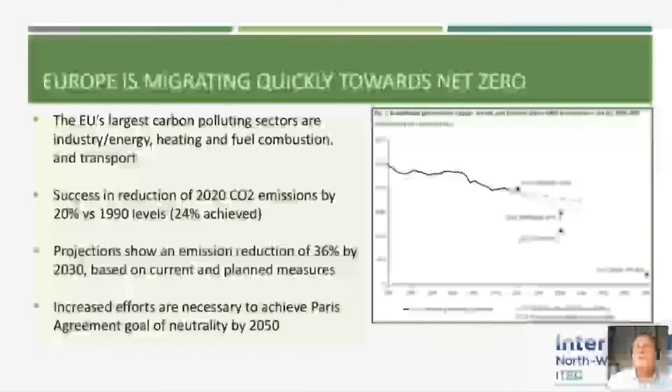So we've heard a little bit from Nigel about what Europe is looking at in terms of its future progression towards net zero. And we've done quite well in terms of the historical picture. We set ourselves a target of 20% by 2020, and everybody achieved that. In fact, we got a better result than we expected. The problem is that in order to get to 2050, we need to accelerate. To get that acceleration, we need to identify new routes for renewables, new locations for renewables, and we need to integrate them with hydrogen as quickly as possible.

The goal now has shifted. By 2030, it used to be up at about 36%. Now we need it to be 55%. And in the UK, as Nigel mentioned, we're looking at about a 75, 78% number by 2035. So every country is beginning to tighten its environmental requirements, and that is driving industry forward at an accelerated rate.

So what does that mean in terms of renewables? Well, the EU has targeted 40 gigawatts of offshore renewables, or sorry, general renewables by 2030, with that growing to maybe 300 gigawatts by 2050. Now, they seem like enormous numbers, and in fact, they are enormous numbers in terms of what we have in

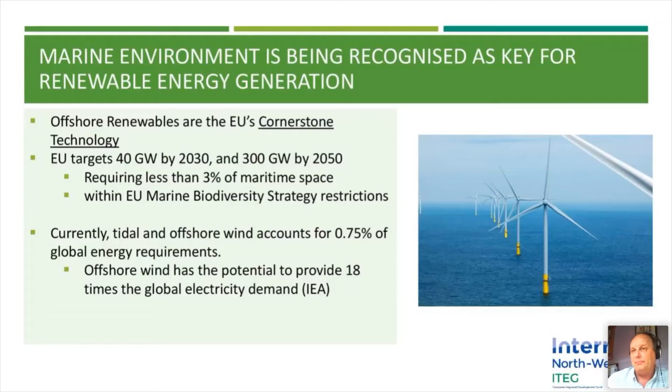So at the moment, what we see is that the offshore and tidal opportunities only account for a very small percentage of global energy requirements. And what we need to do is to step that up. And we see that potential occurring, as Nigel's map indicated. This is all about clustering and electrification of energy streams in the future.

So today what we have is a very good success in terms of creating renewable electricity, and we need that electricity to begin to penetrate into other energy value chains, such as natural gas, such as fossil fuel mobility. And we're seeing those changes begin to occur today. And even if we look at the success that we've had in the last 5-6 years, we've seen green hydrogen

pricing drop dramatically. But what we already know, and again, referring to the map, and I do like that map, Nigel, I'll have to steal it from you at some point, the map which shows the areas of Europe that will require importation of energy, in other words, hydrogen that they cannot actually manufacture themselves. So we know that certain parts of Europe will require the movement of energy in the future.

And we're already seeing that the renewable energy picture is beginning to encompass that. So we're seeing plants being built in the Middle East and in Australia, looking for their customers in different countries and creating mechanisms to move those molecules or those electrons across the world in different forms. And the forms that are being looked at the moment are mainly chemical. So we're looking at ammonia or methanol.

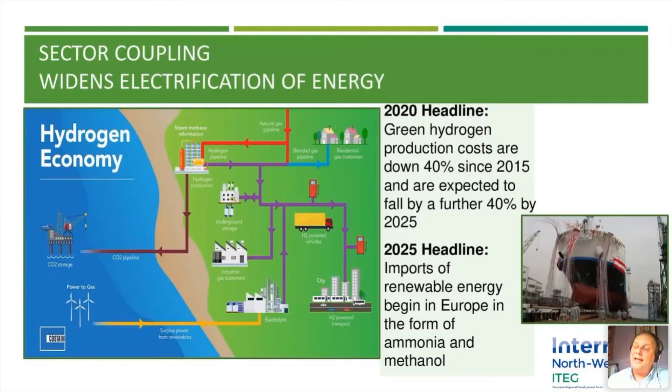And then we're going to need to migrate that energy across the rest of Europe. We'll use natural gas pipelines for that. We convert it into hydrogen, but we're also going to see our chemicals infrastructure converted to renewable structures as well, and thereby undergo this similar electrification. So this is all about scaling up this demand.

And if we look at some of the predominant renewables, obviously wind is one of those. And in Europe, what we've seen, and again, referring back to Nigel's slide, he looked at the UK's position on wind. If I take you a little bit further towards the European coast and look at Belgium and the Dutch coast, we see the scale of electrolysis and the scale of wind investments becoming increasingly large, and with plans to go still larger over the next decade.

And we're seeing both business development and first stage equipment development of multiple numbers of electrolyzers. These electrolyzers are in the hundreds of megawatt scale. Just, let's say, 2-3 years ago, we were looking at 1 megawatt being a world scale PEM size electrolyzer. So what we're seeing is that this technology is scaling very rapidly, and those graphs in the middle of this particular slide show how quickly we're seeing that picture change.

We're seeing the average size of each electrolyzer installation that's actually gone in the ground grow, and we're seeing the future potential in terms of the planned electrolysis systems also grow markedly. And it's a bit like this hockey stick approach.

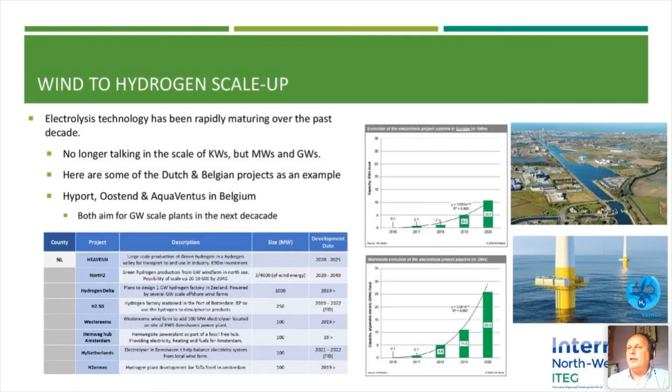But it's not all wind, and we shouldn't just assume that offshore means offshore wind. We have the opportunity of looking at three other different marine technologies, one being floating solar, another being wave, and one that I will focus on for the rest of this presentation, which is tidal.

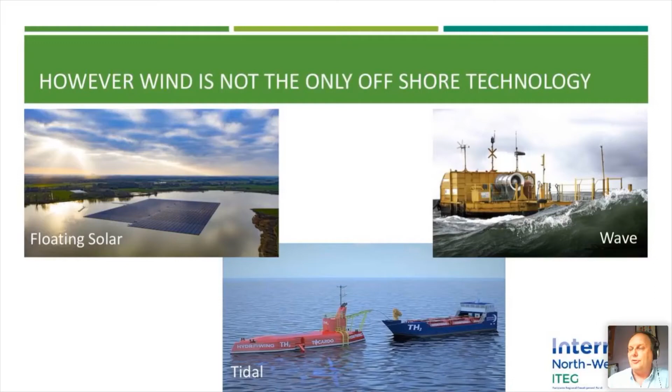So tidal has this position in that it's always been nearly there, nearly getting to the stage where we get a commercial project. We've had a number of false dawns, a bit like the hydrogen false dawns of a few decades ago. But what we're seeing now is some new companies entering into the fray, if you like, and scaling up some of the technologies that have hitherto been deployed by other companies that have since failed.

So we're seeing that tidal still needs support because the investor community is not completely aligned to its future potential yet. But we are also seeing that those innovative companies, normally based either in the UK or along the European coastlines, are coming forward with new technologies and creating new designs for us.

And the IEA has already set out its stall, if you like, that it expects tidal to play a part in this renewables future that we're all going to see. And in order to get to where the IEA believes that marine energy, or at least tidal energy, should be, we need to see something like a 20 to 30% year-on-year growth rate in order to achieve that position.

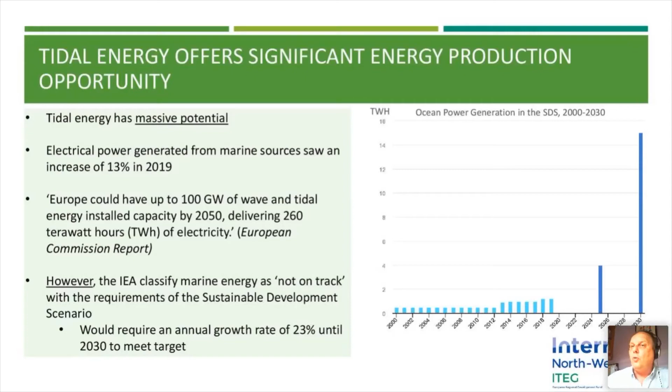So the reason why the UK is particularly interested in tidal is it's probably got some of the best tidal resource in the world, and I would include Ireland in that as well. And we've seen some of the initial development projects go on around our shorelines as well. So this particular technology could offer the UK and the coastal regions of Europe a very prominent position that could then be used as an export market going forward. And I think that's what the European Union is particularly interested in.

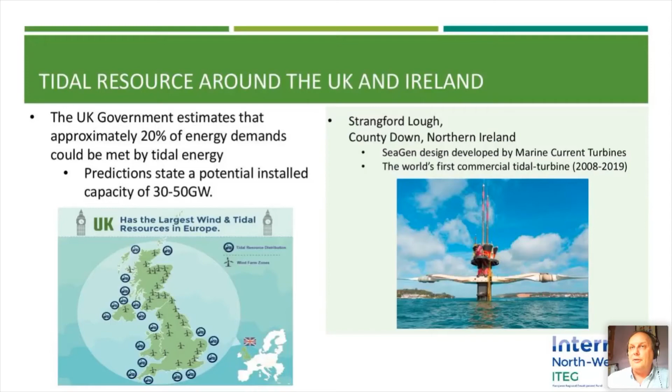If I introduce you to the motley crew that are running the ITEG project, it's a group of companies and academic institutions that have come together in order to try and facilitate the proof of marine energy integration into the European electrical grid, but using hydrogen as a storage mechanism. And you've got three main technology actors: Orbital Marine, Elogen, and EMEC in terms of the infrastructure positioning. And what I'd like to do over the next few slides is just give you an indication as to how all of that begins to fit together.

So we have Orbital Marine as part of this consortium. They have recently just built this thing called the O2 tidal turbine. It's currently being positioned in Orkney, just off the shoreline of Eday, the island that Nigel mentioned. And that will then be moored there, and it will be cabled up to Eday to allow its energy to be managed by a new energy management system.

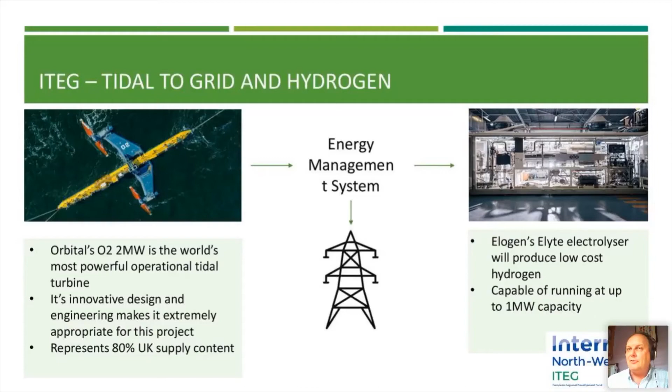That energy management system is going to be designed by EMEC, and then that will feed energy into the grid as required, and where it can't be fed into the grid, it will be fed to an Elogen electrolyzer. And this electrolyzer is quite special because it's capable of running at different rates. In other words, it has a nameplate capacity of 500 kilowatts, but it's also capable of running at higher loads for short periods of time without impacting its longevity, its lifetime. And that can potentially offset the need for the batteries that Nigel was mentioning in terms of the overall scheme.

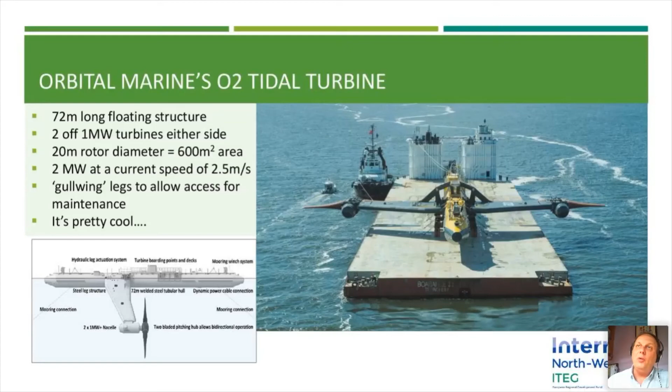So what I want to do is introduce you to these components in a little bit more detail. And really the key one is the tidal turbine. Orbital Marine has been working on this turbine for the last two or three years. Just to give you some element of scale, this thing is 72, 73 meters long. The rotors are 20 meters in diameter. They have, if you like, a 600 square meter area when they rotate. It's an enormous beast at the end of the day.

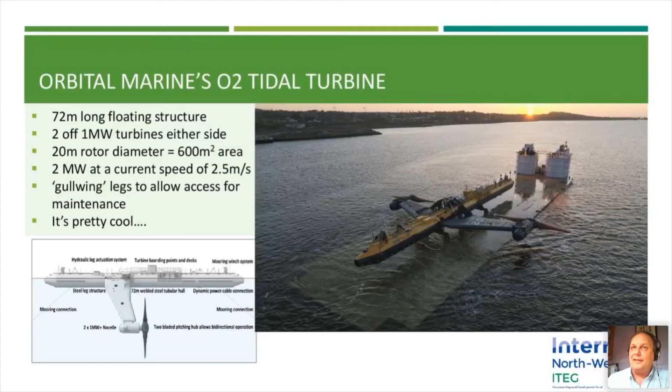And like this slide says, it does look pretty cool, and it probably belongs more in a Star Wars movie than it does in Orkney at this particular moment in time. Mind you, given that Star Wars is filming in the UK at the moment, maybe they can get up and film this as well. But the key piece are the rotors.

The key pieces are how those rotors go into the water and how they can then be moved in a form of a gull wing type structure to allow them to be maintained in a very easy way. So this, as I mentioned, was launched only about a month ago. It's since been towed and maneuvered into place on Orkney, and is effectively beginning its commissioning process.

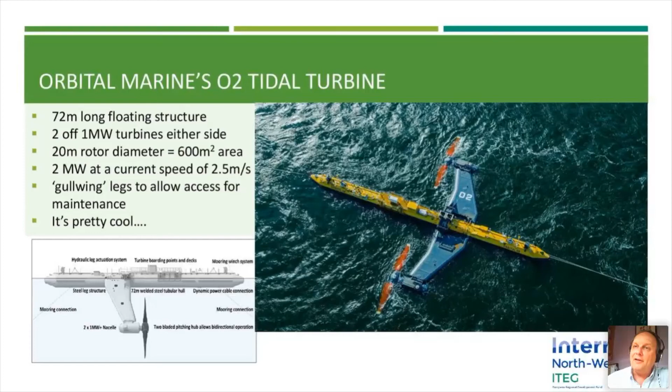Now that's going to be coupled with an electrolyzer, as I mentioned. It's a standard containerized electrolyzer system that will be placed on Eday. The beauty of this particular location is that it is effectively in a marine environment. I mean, we are maybe 20 or 30 meters from the beach on Eday for this location.

And we see that in future, there's going to be many applications where electrolyzers will need to be deployed in marine environments. And we haven't really had significant understanding or significant operating experience as to how these electrolyzers will work in this type of environment in the past. So this is one of the key learning experiences that we expect to get from the ITEG project.

We expect this electrolyzer to be able to load follow and also to be able to manage its production in such a way that it stays warm, so it's very reactive, but that it also is able to, as I mentioned, peak load itself so that it can maximize its output potential.

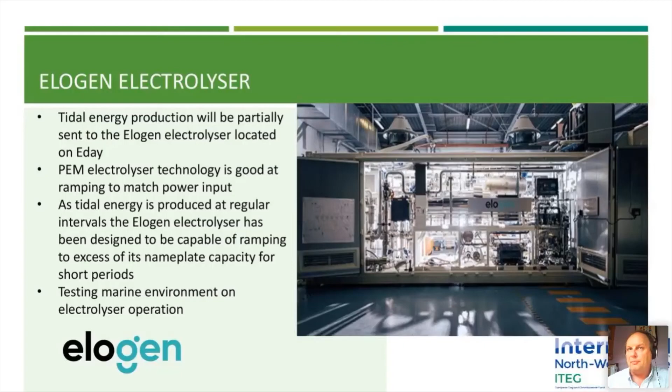And then what do we think this begins to look like in the future? So we know that we're going to have many offshore wind farms, and we also know that we can begin to site floating solar in certain calmer areas of the sea. So if we add in this interface of tidal turbines as well, we begin to get a maximum use out of the marine environment within the areas of the sea that we want to actually exploit. And so bringing the energy together from all of these different renewable options makes sense.

So if we look at what's beginning to happen on the continent, we see the Dutch and the Danish begin to contemplate developing new offshore energy islands. And on these islands, we will see the interconnection of all the existing renewables, and the placement on the islands of electrolyzer systems to convert this energy, or at least some of it, to hydrogen, and then potentially use existing oil and gas pipelines that flow across the North Sea. So reuse that existing infrastructure to allow the hydrogen to be transferred ashore in the most cost-effective way.

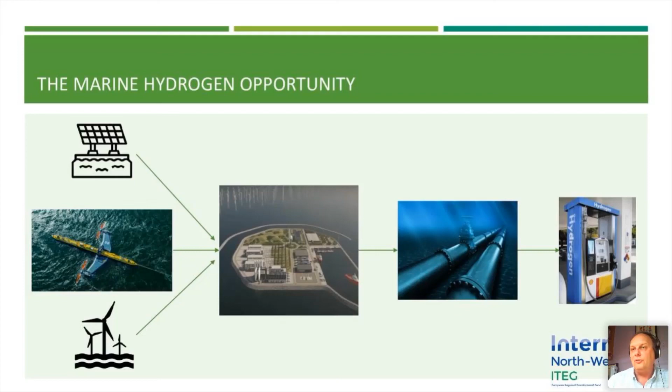So in summary, the UK is an island nation, but also obviously the EU has a significant coastline. We expect the tidal opportunity to be exploited by these coastal nations, because the expertise in terms of the company developments lies for the majority part along the coast. And we're beginning to see the first instance of that within the ITEG project.

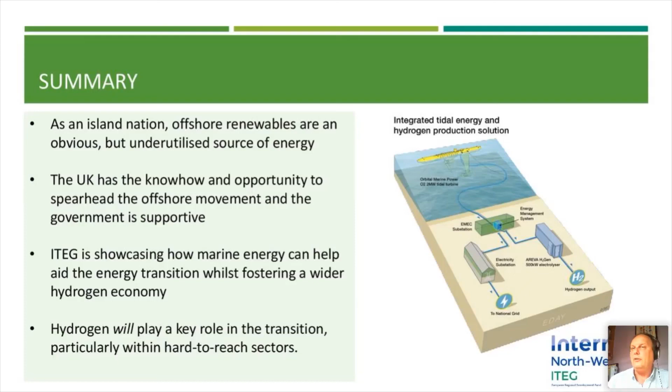And being able to manage this interface between putting the incoming renewable energy either to an electrical grid or to a hydrogen process is a key part of what EMEC are bringing to this particular picture, because that energy management system could then be deployed on a scaled up, wider basis.